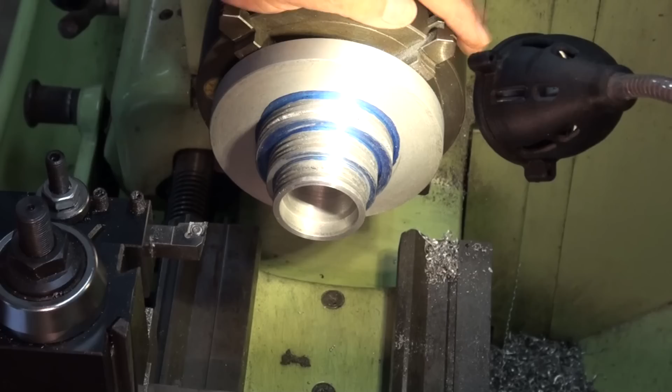G'day, it's Brezzo here, back at the lathe, and welcome back to part 2 of the pull gear, that is the reverse engineering of. In the last episode I got to the stage where I had finished the bottom casting of the pull gear, which included the 3-step pulleys with the poly V grooves in them, and I made a complete hash of this. I tore out huge sections of the casting as I was trying to cut and machine the grooves for the poly V belt.

And as I wound up this last episode, I said I was going to try and track down a piece of 6061 alloy to replace this casting. And I tried and failed to find a piece the right size. The only piece I could find was a seller who had a piece 200 millimeters diameter. It was the correct length. But I thought about it and I just thought, oh, it's going to be turning all of that metal into swarf. It didn't seem right.

So what I've decided to do is just to machine off these 3-step pulley sections and replace that with a smaller piece of 6061. In fact I've ordered a piece that will do that job, and it's going to mean having to attach this replacement machined section to this large disc here, and there's enough metal there to be able to put, say, 6 socket head screws on the inside to rigidly mount that in place. I'll also use Loctite just to ensure that nothing ever gets loose on that.

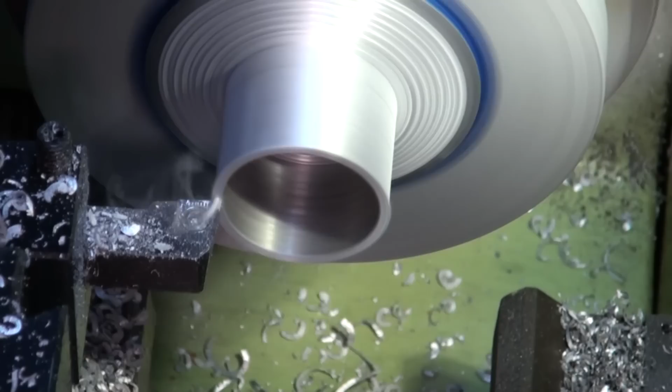So it's a lot of work, but I didn't fancy redoing the casting and possibly having the same problem happen again. So I'm going to go ahead and machine all this off, and we'll make the new part, get that fitted, and then we can keep going with making the rest of the parts. Alrighty, well, that may be a bit sad to have to do that, but it's the only solution I can find that's not going to waste a lot of material.

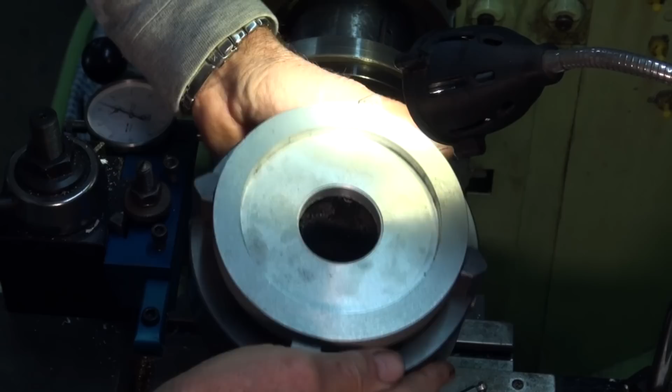One of the next jobs I need to do here is to drill 6 holes around this circumference to attach the ring gear to the casting for the step pulley. And this is the casting that I just machined the back off, and I've got this dialed in a 4-jaw chuck ready to go on, so that after I've drilled my set of 6 holes here and I have the indexing attachment and the drilling attachment for my lathe set up, I can just swap out the chuck and drill all of the holes exactly the same setting. So I'm going to get my drilling attachment set up, and I'll drill the 6 holes, and they're going to be countersunk for socket head screws.

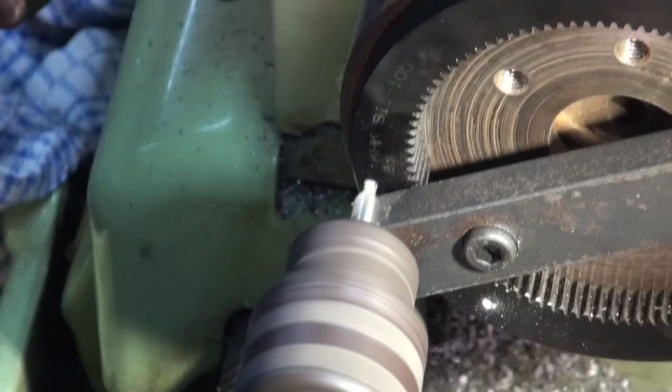Well, there's the 6 holes around the ring gear. These will be later drilled clearance for the screws that I'll be using, and I'll countersink these deeply enough so the heads sit just below the surface. So what I need to do now is to swap out the faceplate for the 4-jaw chuck with the casting for the lower pulley section and drill the identical pattern of holes in it. And I've locked my cross-slide in position, so as long as I use the same number of divisions I should get perfectly matching holes. At least that's the plan.

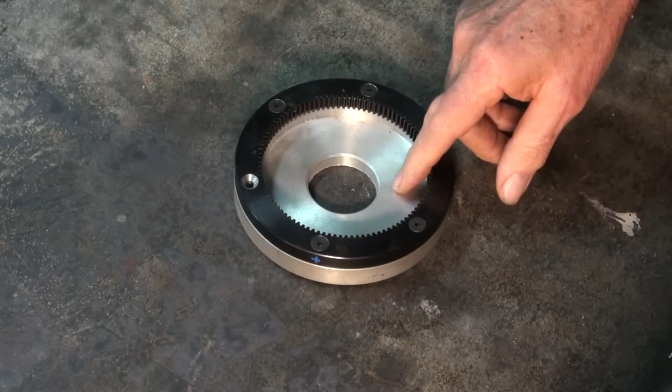Well, here's the assembly. Now, do you want the good news or the bad news? Well, the bad news is that there is no good news. Firstly, I have misaligned one of the drilled holes. All of the other 5 screws went in fine. The drilled hole in the casting underneath here does not line up with the drilled hole in the ring gear. How did that happen? I have no idea. I can only think that I miscounted when I was indexing around for that one hole. So that in itself means that this casting, to me anyway, is scrap and I can't use it.

But the more badder news was that when I checked the concentricity of the ring gear in reference to the aluminium casting, it was out by nearly 0.8 of a millimetre. Once again, I have no explanation as to why that happened, but that means that this part is unusable. Because I had machined the outer circumference of this exactly the size, and the bore on the inside here was also exactly the size, so with that out of alignment with the ring gear, it means that it's scrap. So that means that I have to start again.

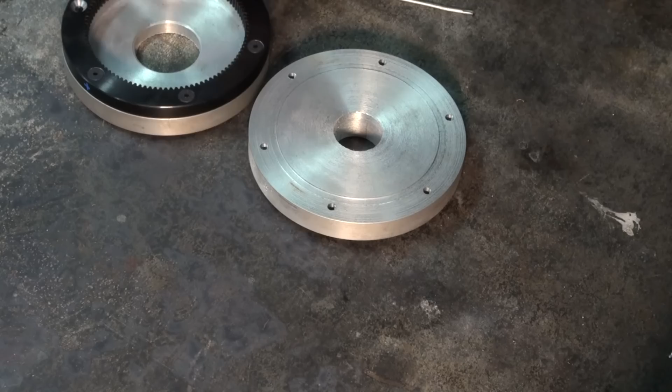So what I've done is I made a new casting for the lower section of the pulley. I machined a shoulder here, which is the same diameter as the inside of the ring gear. So I was able to put the ring gear over that shoulder, and then I spotted through all 6 holes, drilled and tapped, so I know that those 6 holes line up with the ring gear. I've also left this outer diameter oversized by about a millimetre. And all of the other dimensions on this partly machined casting are also oversized.

So when I put the ring gear back on, I will set that up in the 4-jaw chuck and dial in the ring gear, and all of the other features are going to be machined from that ring gear reference. Now, it should have been obvious that that's what you do from the get-go, but I didn't do it.

I've also managed to track down a piece of alloy which I can use to make the step pulley section. That means I'm going to have to fabricate the entire assembly by once again drilling 6 holes and bolting this down to this casting from the inside, which I can do. That's going to work. But it's less than ideal. It means that you don't have the integrity of a complete casting, but given the loads that this thing is going to work under, I think it's going to be okay.

So it's just one of those things. It's like 1 step forward, 2 steps backwards. And I'm angry with myself. I should have been more careful. I should have thought it through more. And like I say, I've got no excuse for what happened there. That's a complete train wreck.

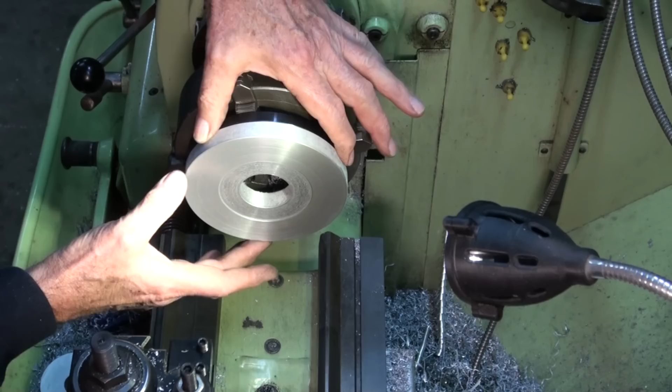Well, here we are back on the lathe, and I must say after that last setback I felt a bit tired and emotional. But I've reset and got the new assembly dialed in on the 4-jaw chuck. So this is the ring gear at the back here, and I've set that to be running as accurately as I can get it. I've also machined this flat face of the casting to be its correct dimension, and I machined the outer diameter of the casting to be almost the correct dimension. I didn't worry about bringing it down exactly the same size as the ring gear.

There's no need. I've also bored out the bearing recess close to its finished size, and I've machined a secondary recess here which is going to allow me to locate this piece of stock. So this is all oversized at the moment, and once I drill through my 6 screw holes, I can machine this to a finished spigot dimension, fit it inside that recess, transfer through the holes and drill and tap everything, and I'm going to torque that down with 6 M5 screws, and I'll also Loctite it as well, just to be as sure as I can that nothing's going to move later.

When all of that's done, I can finish machine the step pulley section. So let's go ahead and get these 6 holes drilled.

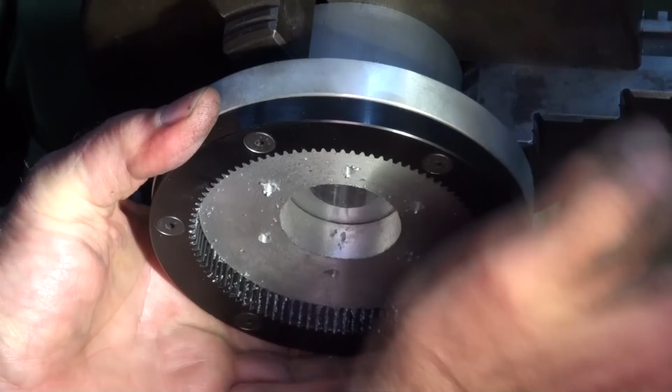Well, that's good enough for me. So I'm going to spot these holes through now and tap the threaded holes in the alloy section, the new stock. And when that's all bolted down hard, I can go ahead and finish off the lower section. There's still some work to be done in here too. There needs to be a recess cut, and we need to bore out precisely for the bearing and the shaft. But you know what? Things are looking up. It's not such a disaster after all.

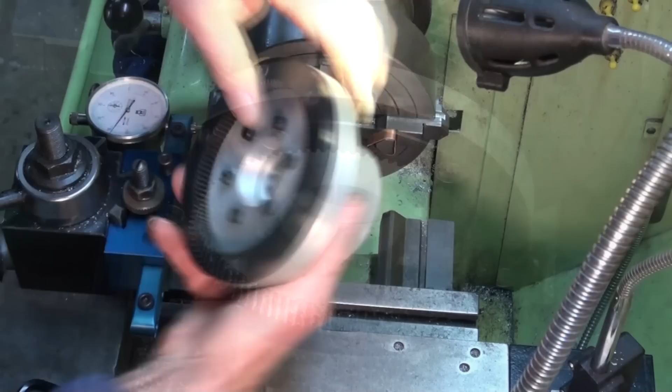So as you can see here, I've torqued down these cap head screws, and they're locking that piece of alloy stock to the back of the base casting. And because all of this is oversized, I can go ahead now and grip this in the 4-jaw chuck and dial in the ring gear and make sure that's running accurately. I've got some copper shim around the jaws of the 4-jaw so I don't damage the teeth on the inside of the ring gear. So let's go ahead and get this all mounted and running true, and then we'll just have a quick look at some of that machining.

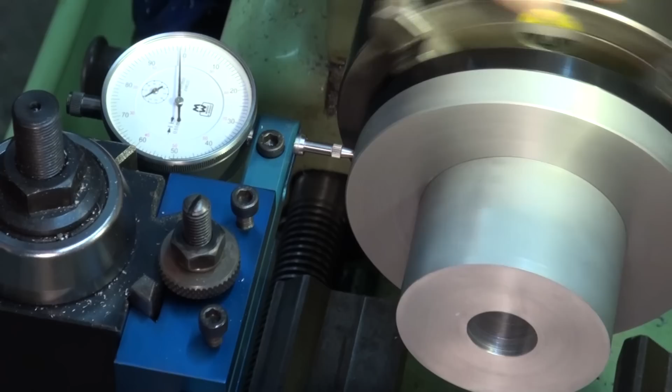Don't know if you can see that, but this edge of the ring gear is not actually truly circular, which is surprising. It's sort of running oddly. It seems to have 2 high spots, 2 low spots. I'll sort of dial it in, get it the average that I can. Like I say, it's a bit awkward because it's not consistently running out. Anyway, I've got it set at an average, so that's about the best I can do. Anyway, we're going to go ahead and get this all machined up here now.

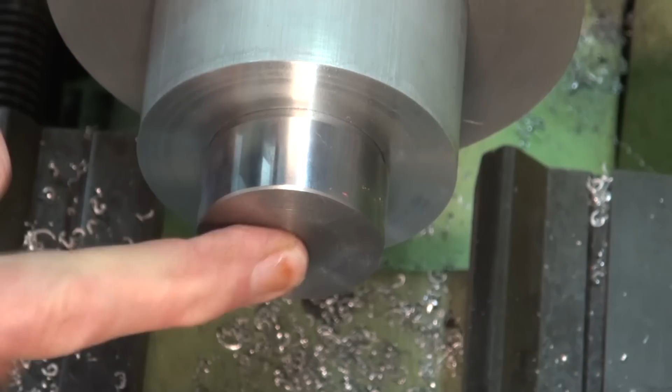I'm going to use this as a temporary center so that when I start machining the outside of this billet I can keep some tailstock pressure on this part. And the bearing looks like it's the right sort of fit. I won't press that in just in case I can't get it out again, but I'm happy with that. So it's got another bore to finish off inside here, and then we can start shaping the outside.

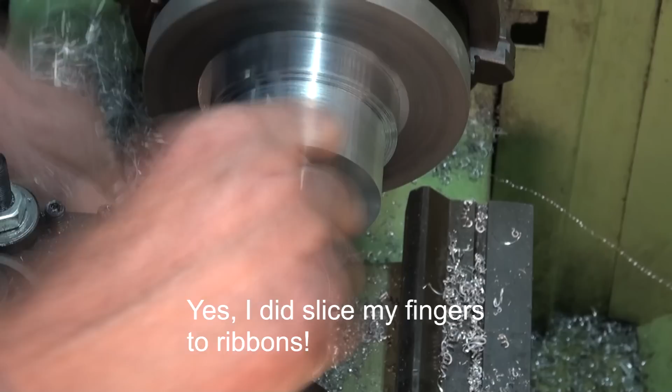Alrighty, that's step 2, so I've got 1 to go, and then the grooves.

Okay, what I've got here is a high-speed steel tool. It's ground much like a threading tool, except the included angle here is 40 degrees, which matches the Poly V belt. And what I need to be able to do is to cut 3 grooves in each one of these diameters, and the last time I just plunged the tool straight in, and of course that led to disaster.

What I've done is I've set my compound slide round to half the flank angle, that's 20 degrees off 90 degrees across the lathe. I have set my tool so it's parallel to this face here, and I have offset the tool from this corner of the stock, this corner of the pulley face. And all I could do there was just eyeball it. So I've used a steel rule, I placed that against the shoulder, brought the tool back until I thought the corner was against the edge of the steel rule.

Now, I did watch a video by Joe Pieczynski who showed how to offset angular tools from edges and faces and so on, and it was brilliant, but I forgot it all. And in any case, it doesn't really matter. What's important is that the 3 grooves are equally spaced. The offset from this edge is less important. The belt is not as wide as that face, so even if I get it slightly wrong, it doesn't matter.

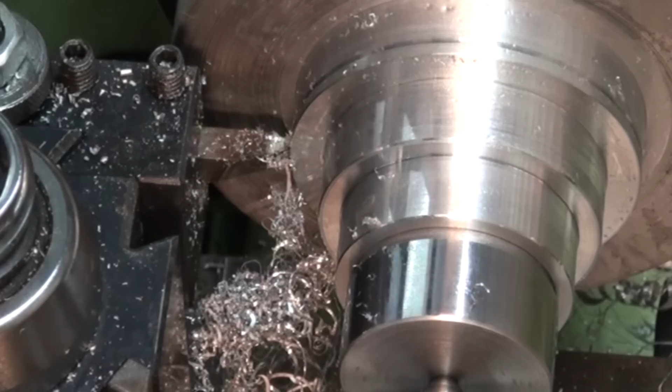We're at about 45 thou deep. Seems to be going okay, but I'm noticing that one edge is starting to gall up a little bit, which worries me. If it gets really bad, I'll lower the speed even more. Okay, that's 55 thou. I just heard it starting to dig in there.

Now in theory, it's really only cutting on the square end and the left-hand flank. However, it presents a very wide cutting face to the stock, so the load on the tool tip goes up quite high as you start to cut across a broader area. And given that this lathe is old and not super rigid, the potential then is for the tool tip to dig in and deflect downwards.

Now in theory, if it deflects downwards, the load on the tool tip clears and it'll spring back up again, but you tend to get this sort of oscillating effect, and that's when you get chatter and that sort of thing. So I'm just going to lower my RPM a little bit more.

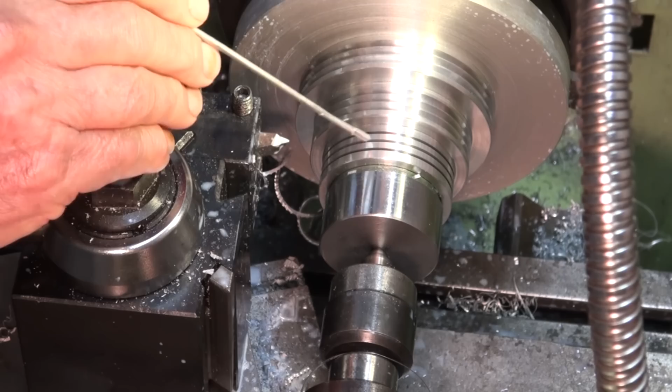So I packed up and slept on it, and today what I have done is I've cut all of the groove positions with the parting tool first. So I've already done these three here with the V tool. These three are the last three to be done. So with the parting tool, I've got an inverted parting tool holder, and I ground a blade that was very thin. It's just over 1 millimeter thick. I indexed the correct position off this shoulder here and cut each of those 3 grooves to the correct depth.

And what that does is it sort of removes the bulk of the material. So then the V-tool only has to form the shoulders of the V groove. And I also have a pretty dodgy sort of Chinese electromagnetic coolant pump underneath my lathe here. And I also reasoned that if I was able to get a constant supply of coolant, it would not only keep the blade from expanding and jamming in the cut, but it just provides that lubricant as well. So you know what, there's no problem you can't solve with a bit of lubricant.

So I'm about to do these 3 here, and if I get that done without a mishap, I'm sort of feeling a lot better about this. But as of yesterday, I was just ready to chuck this whole thing in the bin and not go any further with it. The only problem was I'd already uploaded part 1 of the video, so it would have seemed a bit strange if I didn't follow through.

Incidentally, I noticed that Mr. Pete finally got his pull gear apart, and he's uploaded a video showing the interior of the pull gear. And as I suspected, I don't know how he's getting a 7:1 ratio with that set of gears that he has. So I'll have to pause the video and do a tooth count, but I'm pretty sure it's not going to be 7:1. There was a version that came out with a 7:1 ratio, and from the information I can find, it had a double reduction in the planet gears. The one that he has doesn't have that. So hopefully Mr. Pete's going to shed some more light on that soon.

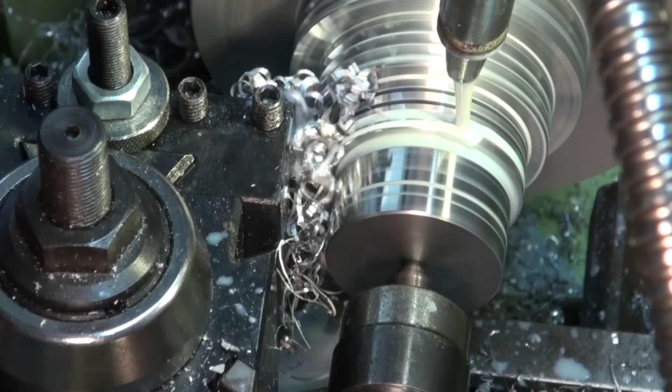So let's go ahead and get these 3 grooves finished, and we're looking sweet. So here we go. Alright, that went okay. So I just keep indexing across now the distance between each V groove, and we'll go from there.

So what you should be able to see now is that the 3 beads on the back of that poly V belt fit into those 3 grooves, and you get quite a large surface area as it wraps around those 3 indentations. And because the belt is very thin in section, it wraps really well around that smaller diameter. So you do get a very positive drive, and it runs very quiet and very cool, and it's very efficient. You don't get a lot of friction to sap energy from the drive.

So what I need to do now is take this out, flip it around, and start machining out the inside of this casting section, and that's where the idler gears are going to fit. So I'm very glad to have that finished. That was a bit of a nightmare, and I could see that I was very close to snatching defeat from the jaws of victory there.

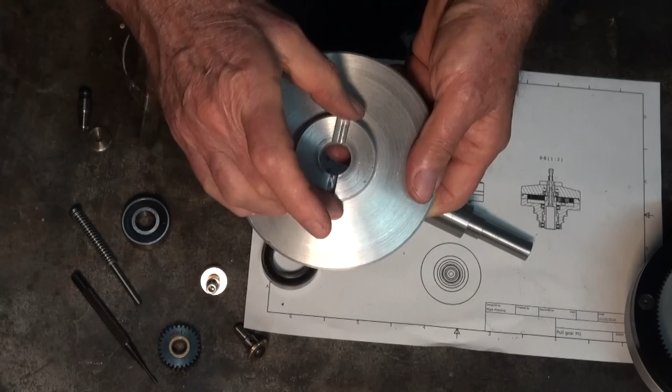Okay, progress report as I close out this video. I think I've sort of done enough to fill up 35 minutes. What I got done today was I machined this 8mm wide slot in the top of the cap casting. This allows for a latch to be dropped into that slot, and that locks the center spindle to the top cap. That effectively gives you a 1-to-1 drive with the pull gear. If you want to engage the low speed drive, you need to lift that latch out and rotate it through 90 degrees, and then it holds in a position above the top cap. That allows the center spindle to rotate independently of the step pulley section.

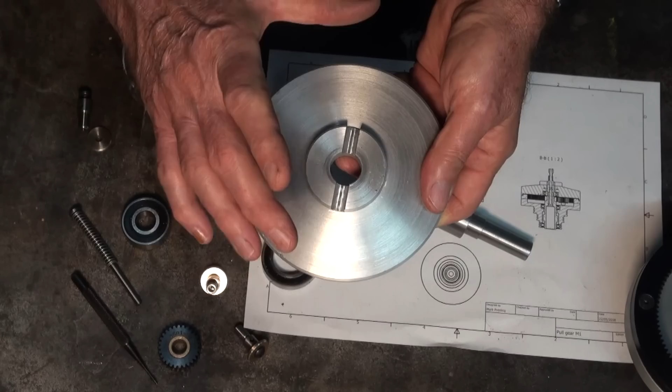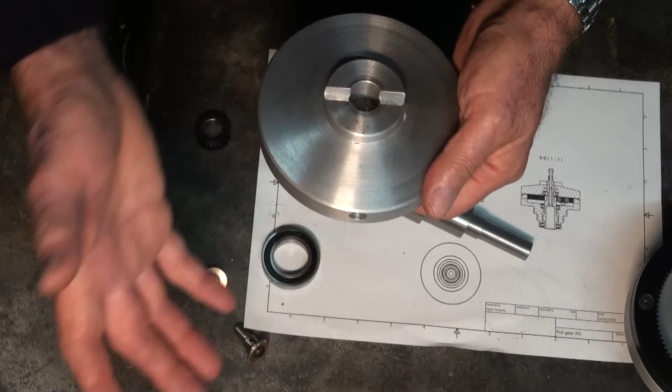Now, when you want to engage the low speed drive, what you need to do is to lock this top cap into position so it cannot rotate. To do that, there's a 3/8 diameter drilled hole in the edge of this casting, and a steel rod will be inserted in that, and that steel rod is locked to the body of the drill press. So there's a 2-step process to engage the low speed. You need to lift the latch out and insert that steel rod to lock the cap in position. So the cap is more or less finished. The bearing recess for the top of the spindle is done.

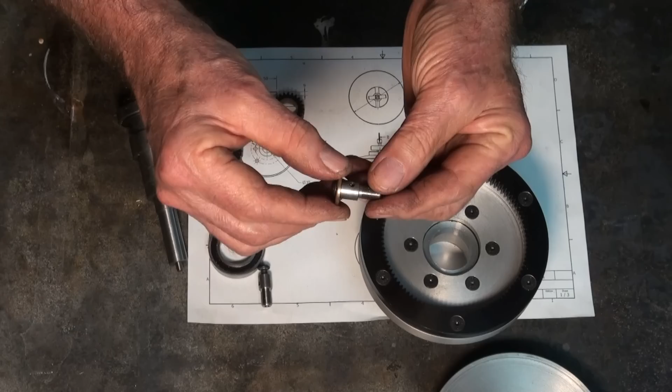The one remaining job to be done here is to drill 4 holes in the underside of this cap for the spindles, which are going to hold the idler gears in place. So these spindles have been machined from stainless steel. It was probably a poor choice because it was extremely hard to machine and cut the threads and all that sort of stuff. It was just very tough stainless. And I thought long and hard about how I was going to fit these spindles into this cap, and I thought about press fitting them and using Loctite. And in the end I decided to cut very fine thread. That's a 5/16 by 40 TPI model engineer thread. It's undercut at the shoulder, so it will screw down all the way to the shoulder.

The length of the stud is 0.1 of a millimeter more than the thickness of the gear, so that when that's screwed down hard, the gear will just rotate just clear of the cap. And I also thought about how I was going to get some torque on this to actually hold that in place as well. And in the end I decided to drill a cross hole, and I can use a steel rod or a pin punch or something. Here we are. So I can put a pin punch through there and use that to get some torque on that stud and hold it in place.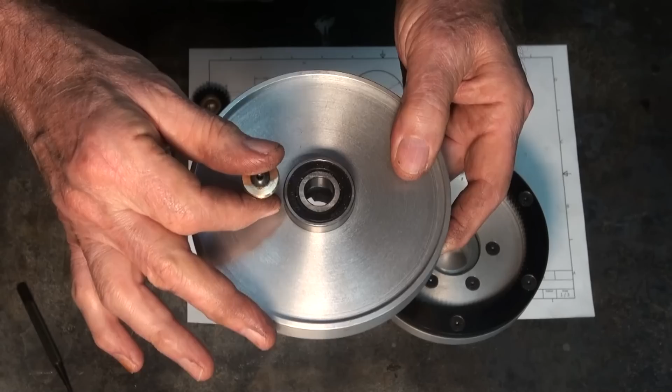Now it also meant that I could have a through hole which connects up with that cross hole. And I had one of those moments of clarity, I suppose you could say, when I thought, well, I could use this to lubricate the sintered bronze bushes in the center of the gears. So the idea is going to be that when I have drilled through and threaded for each one of those studs, I'll continue the drilled hole all the way through to the other side of the cap. And I'm going to fit some of those little brass ball oilers in the cap.

So there'll be 4 of them, 1 for each stud, and because they're spring-loaded ball ends on them, I can inject oil through those studs and they'll close up and stop dust and debris from getting into the bushes. So I thought, oh, that's cool. That's something that the original manufacturers didn't think of. They actually fitted 2 brass oilers in there, but I think they just splashed oil on the gears. So this is going to be one of those really cool features that will stop those little sintered bronze bushes from running dry, if you remember to oil it.

So each one of those little studs is done. There's a bronze washer on the top, and it's going to just prevent the gear from coming off the stud when it's inverted. So remember, all of this is upside down when it's in operation. Now the location for each one of those holes I'm going to take from the CAD drawing. I've drawn this out, so I've got 0.1 millimeter clearance or backlash for each of the gear sets, and I intend to drill this on the CNC mill.

Now it's a high risk strategy, so I'm not going to do it in this part until I've tried it out on a piece of scrap material, and if I'm happy with that, I'll go ahead and drill each one of those holes. So yeah, the cap's done except for those 4 holes and fitting the oilers, which I've ordered and they're on the way.

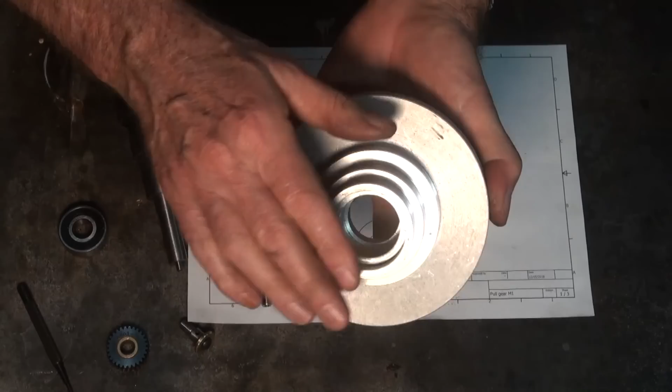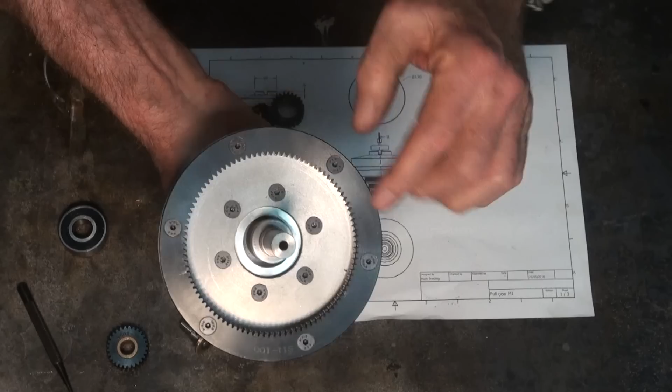Now this was the part that gave me the most grief, and I think I've got away with it this time. So here's my stepped pulley. It's now held in place with 6 M5 countersunk screws, and I've Loctited this as well so that it's essentially one component now. Bearing recess is cut. The clearance for the main spindle has been cut, and that's all going to assemble in there like that later on when the bearing is pressed home. Second bearing at the top in this recess here, which is still to be machined, and the drive gear will fit in place like so. So that's like 80% done as well.

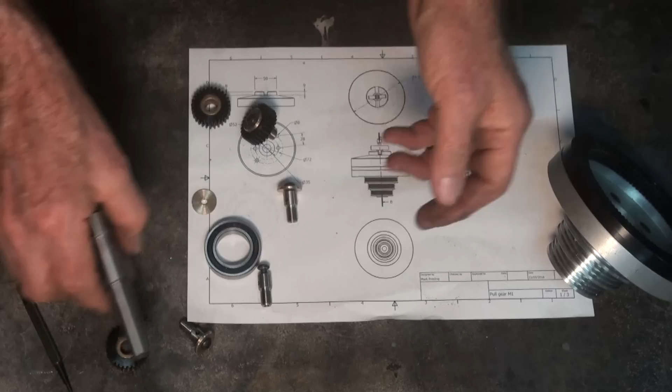The spindle has a plunger on the inside. Now this part is going to be protruding from the top of the spindle, and there'll be an 8mm wide steel latch assembled onto that, and that's what's going to lock or unlock the drive. So that's just a bit of mild steel and just a bit of a spring that I had lying around. So that's looking good. So is it going to work?

Don't know. I have ambitions that are a bit beyond my skill level sometimes. I'm keen to see how it winds up, and I do really need some sort of reduction drive on my drill press. It just doesn't have the power that I need to run large diameter drill bits, so we'll see how we go. So I'll leave this here now.

I think my explanations are a bit long-winded sometimes, but hey, if you want to be entertained, go and watch This Old Tony. So for now, we'll wind up here. The next episode you see, hopefully we get this at a stage where we can tell whether it's going to run or not.